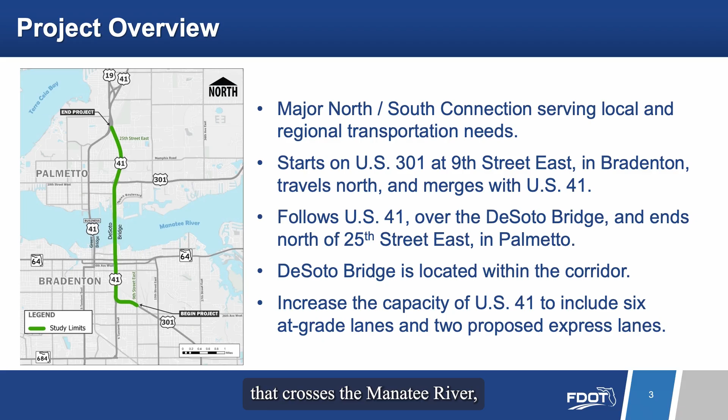It includes an important north-south connection that crosses the Manatee River, connecting the cities of Bradenton and Palmetto, and serves local and regional transportation needs.

The study starts on US 301 at 9th Street East in Bradenton, travels north and merges with US 41. The study continues along US 41 over the DeSoto Bridge and ends north of 25th Street East in Palmetto. The DeSoto Bridge is located within the corridor.

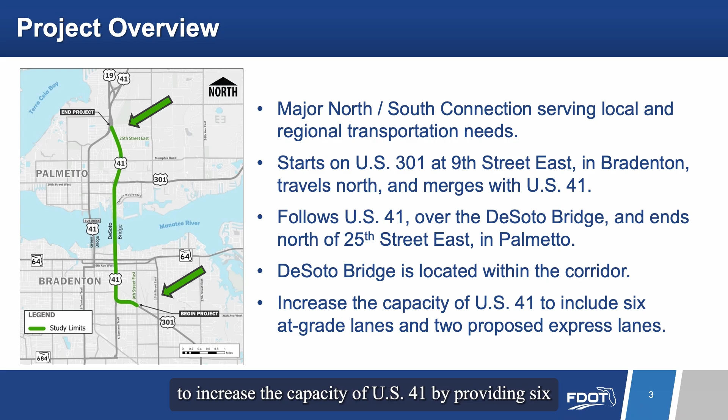The department proposes to increase the capacity of US 41 by providing 6 at-grade lanes and 2 proposed express lanes.

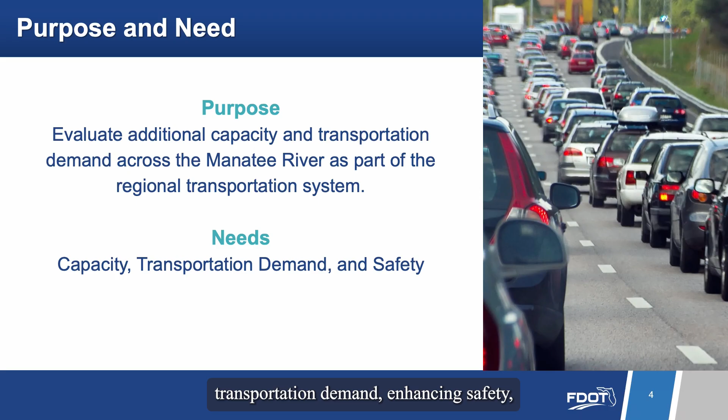By 2045, Manatee County's population is projected to increase by almost 200,000 people. As a result, our alternatives focused on increasing capacity by adding lanes, addressing growing transportation demand, enhancing safety, and improving our regional transportation system.

Within the project limits, the existing roadway includes multiple roadway configurations with a varying number of travel lanes and bicycle and pedestrian facilities. The following slides illustrate the current existing conditions of US 301, US 41 within the study area.

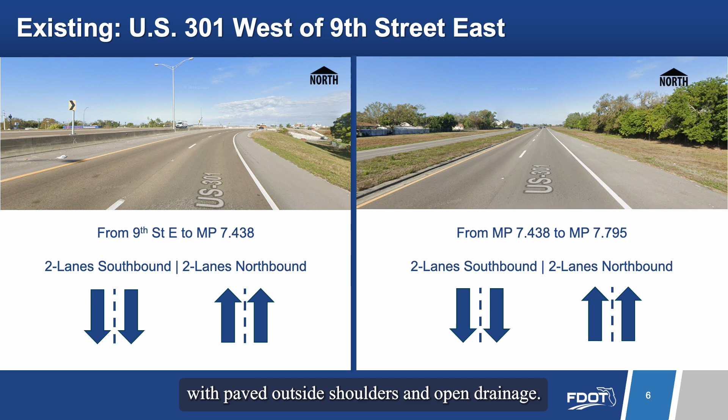The no-build alternative assumes that no capacity improvements are made through the year 2045 except routine maintenance. US 301 west of 9th Street East is 2 lanes southbound and 2 lanes northbound, with no sidewalks and no bike lanes. The median varies from a concrete barrier to a grassed median with paved outside shoulders and open drainage.

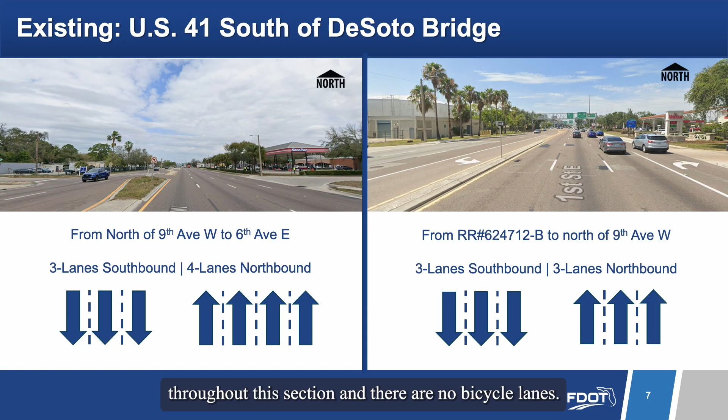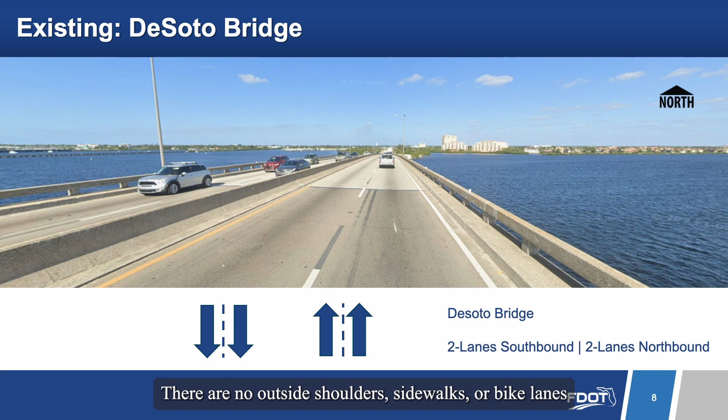The existing DeSoto Bridge has 2 southbound and 2 northbound lanes separated by a concrete barrier. There are no outside shoulders, sidewalks, or bike lanes on the bridge.

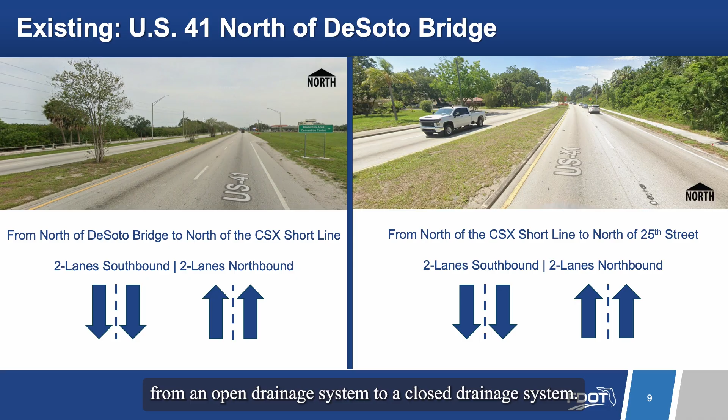US 41 north of the DeSoto Bridge has 2 southbound and 2 northbound lanes, separated by a grass median with intermittent sidewalks and no bike lanes. The corridor varies from an open drainage system to a closed drainage system.

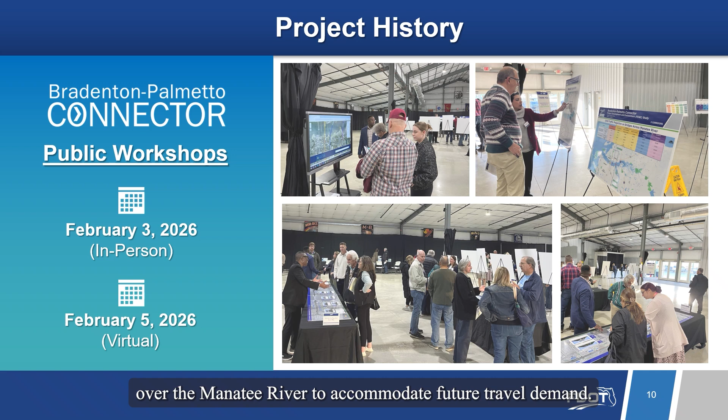Throughout this PD&E study process, FDOT evaluated multiple concepts to improve the operational capacity over the Manatee River to accommodate future travel demand. After environmental and engineering analyses and public and agency comments, many of these alternatives were eliminated.

The last Bradenton-Palmetto Connector public workshops were held in person on Tuesday, February 3, 2026, and virtually on Thursday, February 5, 2026. Based on your feedback and additional environmental and engineering analyses, a preferred alternative was selected for the Bradenton-Palmetto Connector.

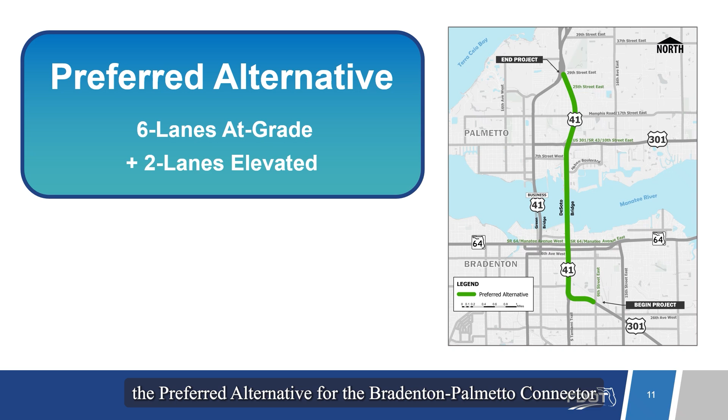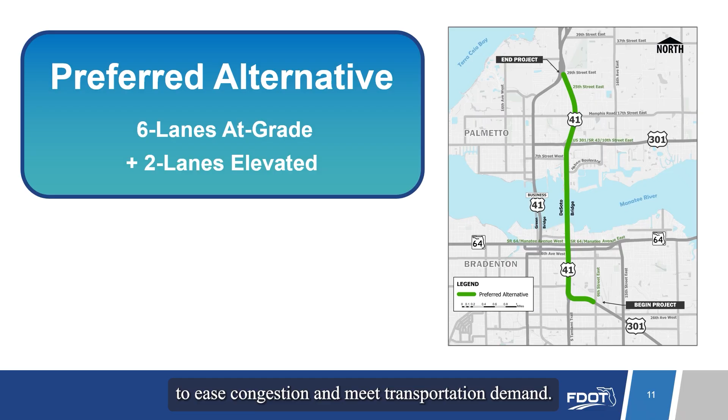The preferred alternative for the Bradenton-Palmetto Connector results in adding capacity to US 301, US 41 between 9th Street East in Bradenton and north of 25th Street East in Palmetto to ease congestion and meet transportation demand.

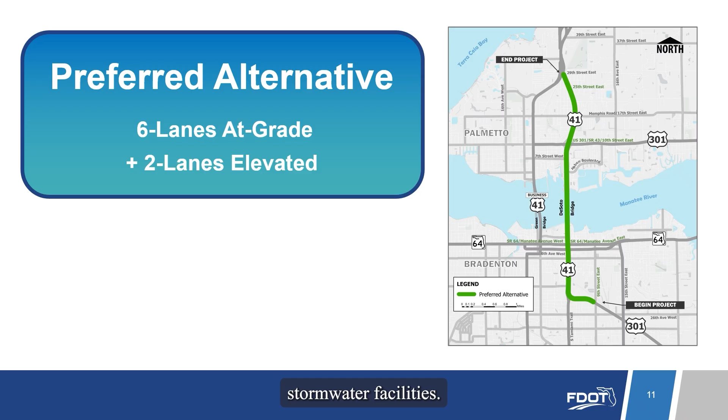Bicycle and pedestrian facilities will be provided throughout the project limits. Stormwater runoff will be conveyed to off-site stormwater facilities. The design speed varies from 40 miles per hour to 45 miles per hour throughout the project area.

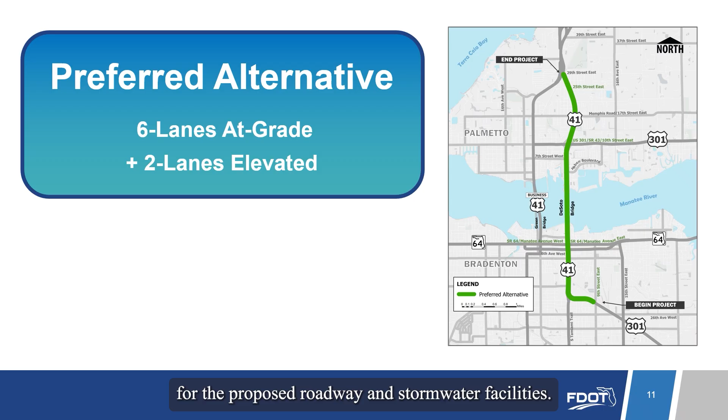It is anticipated that additional right-of-way will be required for the proposed roadway and stormwater facilities. For additional information on potential parcel impacts, please speak with a staff representative here tonight. The following 3 slides show the proposed long-term improvements.

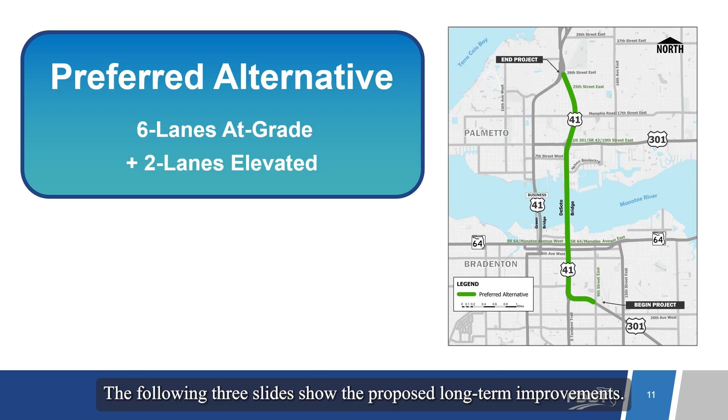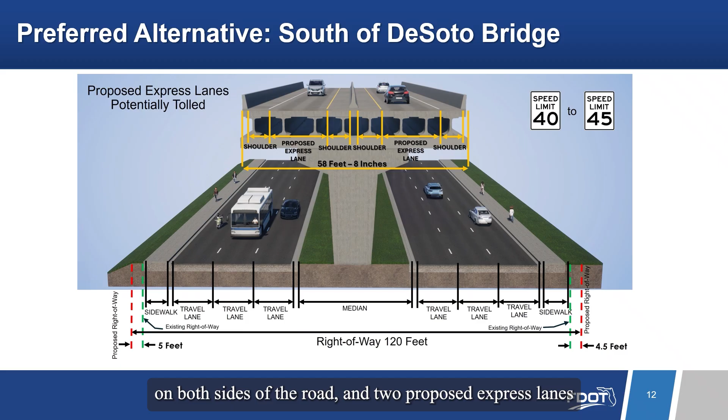South of the DeSoto Bridge, the proposed roadway would include 6 at-grade lanes with sidewalks on both sides of the road and 2 proposed express lanes elevated on a structure that could be tolled.

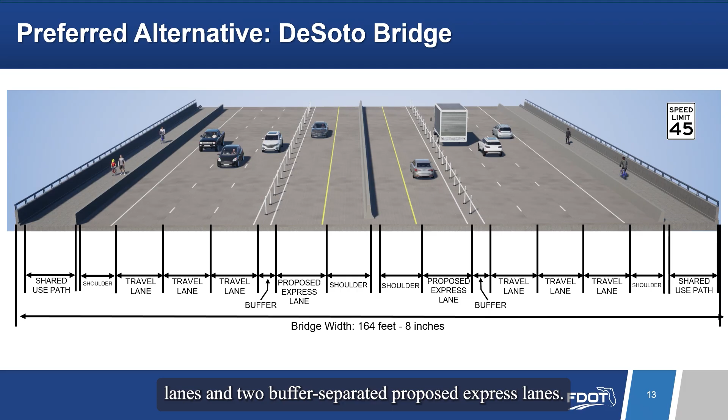The DeSoto Bridge is proposed to include 6 general-purpose lanes and 2 buffer-separated proposed express lanes. Shoulders and a shared-use path would be included on both sides. A concrete barrier would separate the 2 directions of travel.

North of the DeSoto Bridge, the proposed roadway would include 6 at-grade lanes, a shared-use path on both sides, and 2 proposed express lanes elevated on a structure that could be tolled.

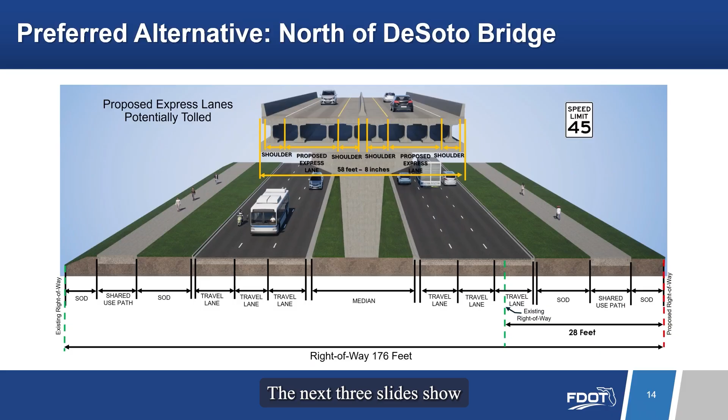The next 3 slides show the proposed interim improvements, which are intended to provide near-term congestion relief or improved traffic flow. It would be built before the elevated lanes.

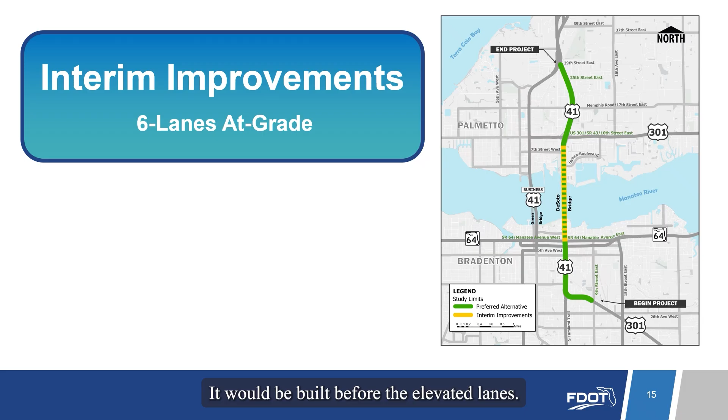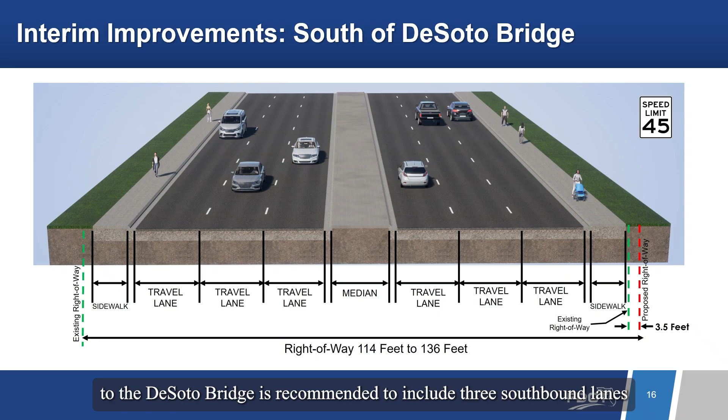In the proposed interim improvements, the roadway from westbound State Road 64, Manatee Avenue, to the DeSoto Bridge is recommended to include 3 southbound lanes and 3 northbound lanes, with sidewalks on both sides, no bike lanes, and a raised median.

On the DeSoto Bridge, the proposed interim improvements include 3 through lanes in each direction, inside shoulders, and a shared-use path on both sides of the bridge. The bridge will be built to accommodate the preferred alternative.

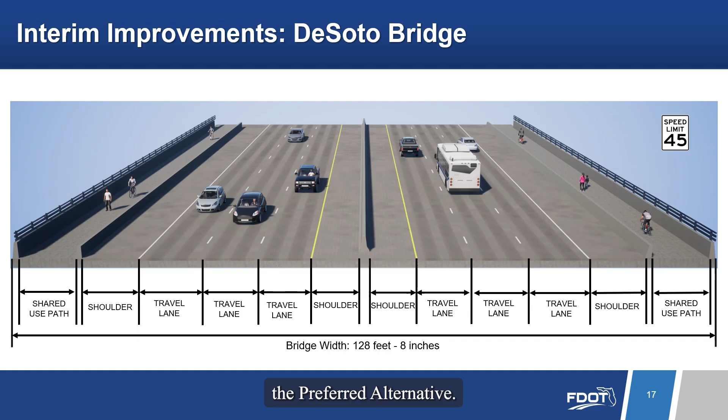The roadway north of the DeSoto Bridge is proposed to include 3 southbound lanes and 3 northbound lanes, separated by a grass median with a shared-use path on both sides of the roadway, and no bike lanes.

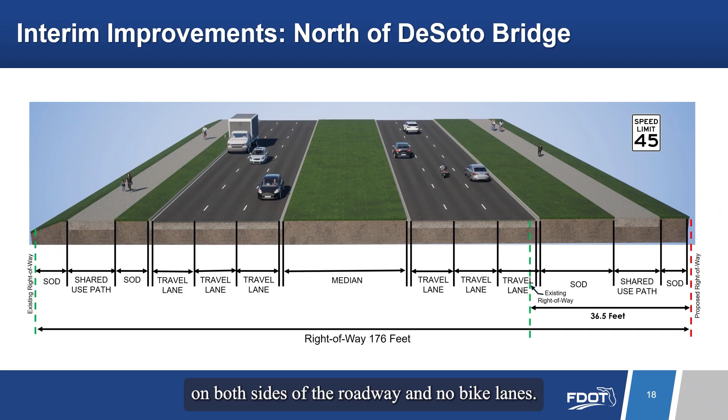Throughout this study, a no-build alternative is also considered. The no-build alternative assumes that no improvements are made through the year 2045 except for routine maintenance. There are advantages and disadvantages to the no-build alternative.

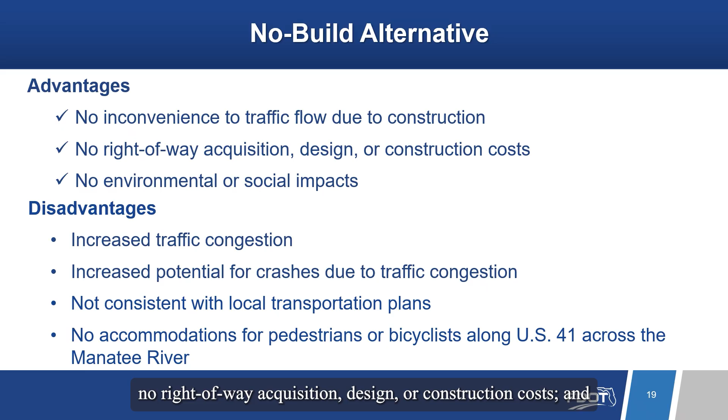Advantages of the no-build alternative include no inconvenience to traffic flow due to construction, no right-of-way acquisition, design, or construction costs, and no environmental or social impacts.

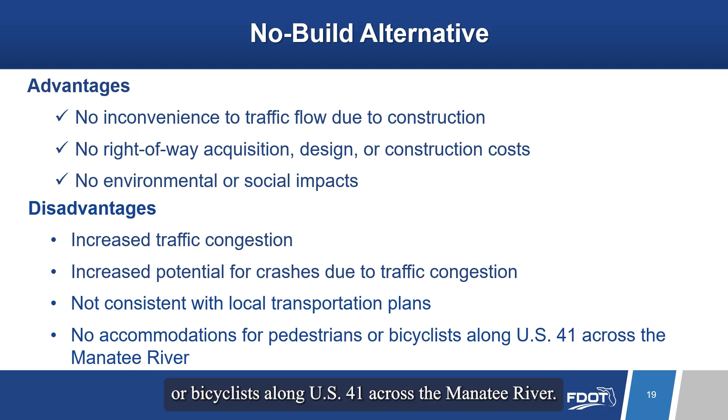Disadvantages could include increased traffic congestion, increased potential for crashes due to traffic congestion, not consistent with local transportation plans, and no accommodations for pedestrians or bicyclists along US 41 across the Manatee River.

The no-build alternative remains a viable option and will continue to be evaluated until the completion of this study.

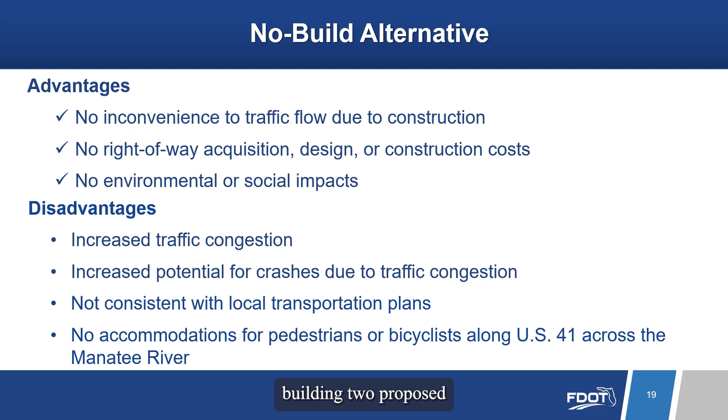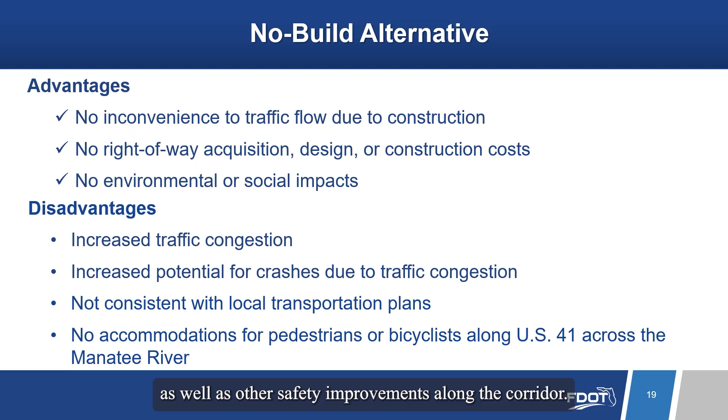However, the Bradenton-Palmetto Connector preferred alternative would include increasing roadway capacity, building 2 proposed express lanes, 2 additional general-purpose lanes, replacing the DeSoto Bridge, and adding bicycle and pedestrian facilities as well as other safety improvements along the corridor.

FDOT evaluated environmental and socioeconomic factors relating to the new proposed improvements in accordance with the National Environmental Policy Act of 1969, as amended, and other federal requirements. The evaluation considered the effects on US 301, US 41 to accommodate 6 lanes at grade and 2 proposed express lanes for the Bradenton-Palmetto Connector, including wetlands, protected species, water quality, contamination sites, recreational sites, noise, air quality, historic structures, archaeological sites, and floodplains.

Based on the analysis, there are no significant effects associated with the preferred build alternative. The following slides describe the preferred alternative impacts only. For interim improvements impacts, please refer to the evaluation matrix display board presented this evening.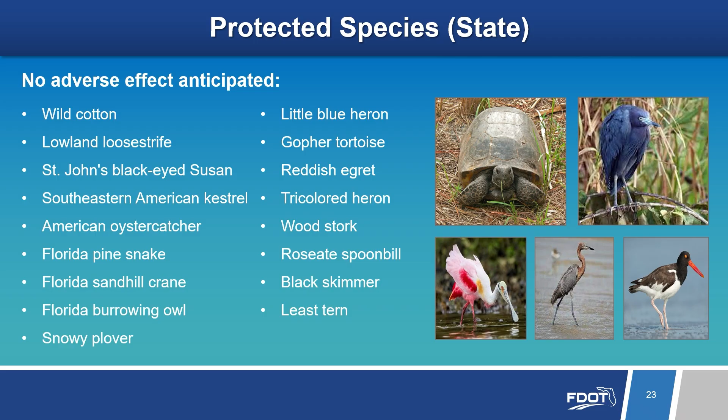It was determined that the project will have no adverse effect anticipated on the state-listed threatened and endangered species listed on the screen. Coordination with the U.S. Fish and Wildlife Service, the Florida Fish and Wildlife Conservation Commission, and the National Marine Fisheries Service regarding the final status of these species is ongoing.

If the preferred alternative is approved by the Office of Environmental Management, FDOT District 1 will continue to work closely with environmental agencies in future phases, such as design and construction, to meet all environmental permitting requirements.

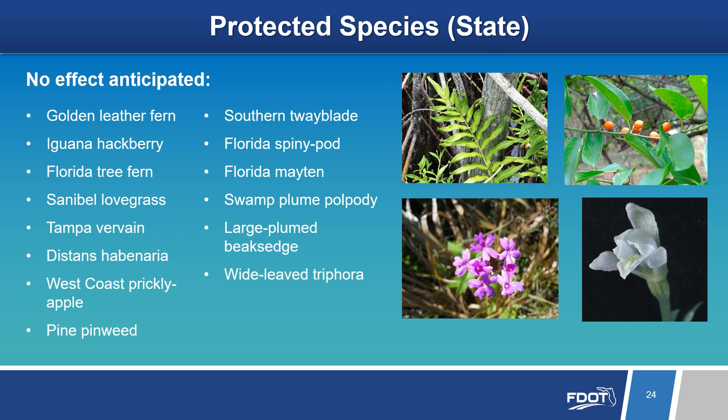FDOT evaluated wetlands within the project limits in accordance with Executive Order 11990, Protection of Wetlands. The proposed improvements will affect approximately 1.83 acres of wetlands, less than 0.10 acres of surface waters, and 1.10 acres of other surface waters. The department will mitigate wetland impacts which will result from the construction of this project pursuant to Section

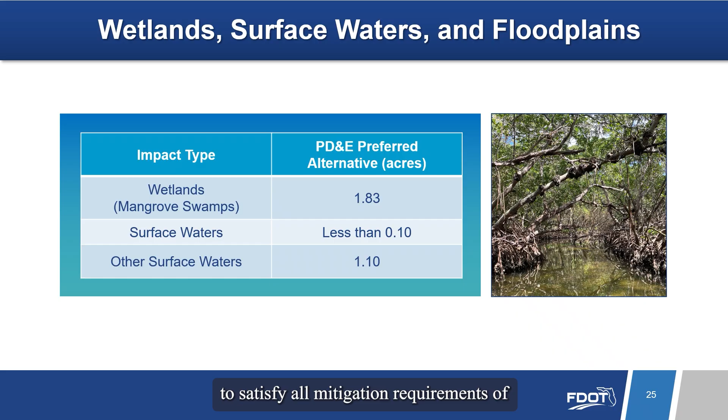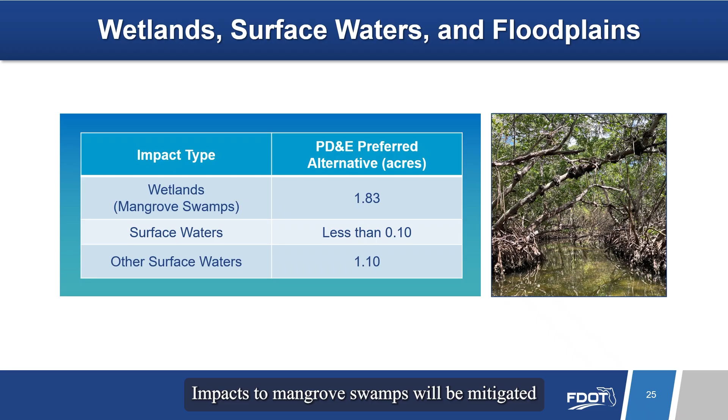373.4137 Florida statutes. To satisfy all mitigation requirements of Part 4 of Chapter 373 Florida statutes and 33 U.S. Code USC 1344, impacts to mangrove swamps will be mitigated by the purchase of wetland credits through a federal and state permitted mitigation bank whose service area is within the Manatee River watershed.

The project has been evaluated for potential floodplain involvement in accordance with Executive Order 11988, Floodplain Management. Although this project is located within the limits of the 100-year floodplain, no work is being proposed below the 100-year flood elevation, and thus, this project does not encroach upon the base floodplain.

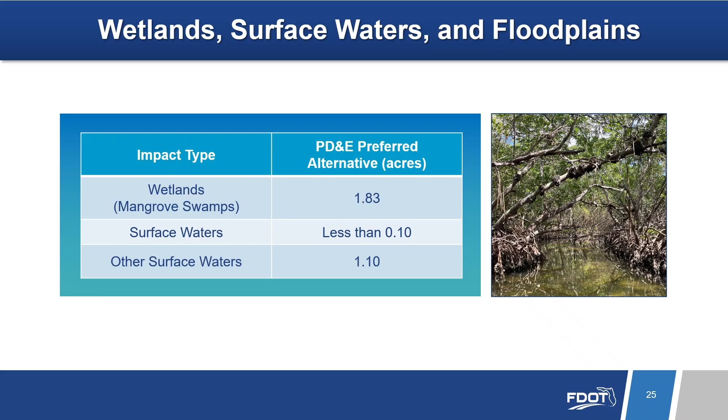Traffic noise studies were conducted for the preferred alternative. Traffic noise impacts were predicted during the design year at residential and recreational land uses.

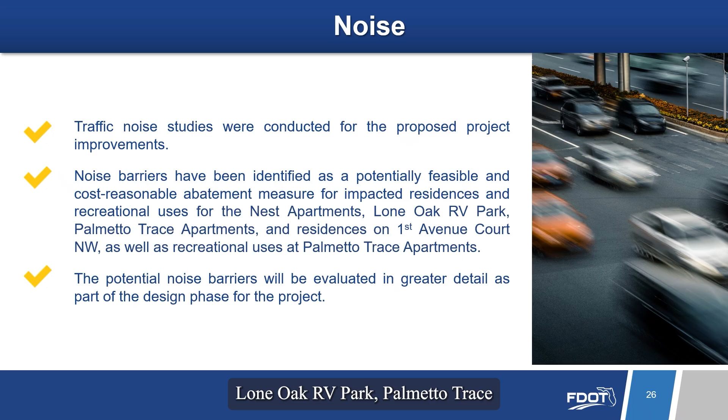Noise barriers have been identified as a potentially feasible and cost-reasonable abatement measure for impacted residences at the Nest Apartments, Lone Oak RV Park, Palmetto Trace Apartments, and residences on First Avenue Court Northwest, as well as recreational uses at Palmetto Trace Apartments. The potential noise barriers will be evaluated for engineering and construction feasibility during the project's design phase.

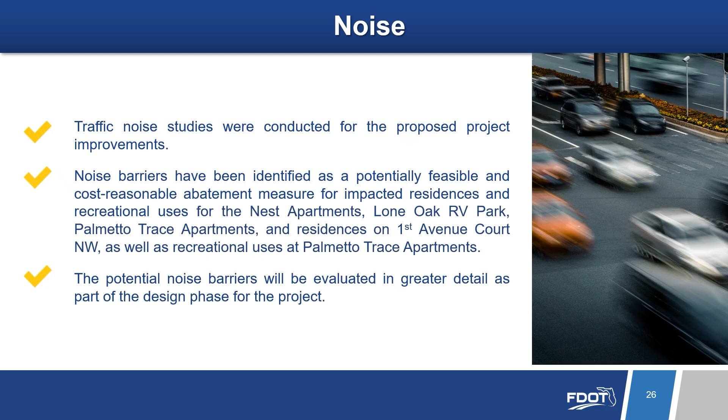The team examined the project area for publicly owned properties that may be affected under Section 4F of the Department of Transportation Act of 1966. Coach Eddie Shannon Park, also known as Lincoln Park, is a Section 4F resource.

The preferred alternative includes constructing the northbound travel lanes and the associated clear zone. FDOT will further coordinate with Manatee County during the design phase regarding potential impacts within Coach Eddie Shannon Park.

Based upon the proposed minor impacts, the project will not adversely affect the features and use of Coach Eddie Shannon Park. Therefore, FDOT is pursuing a Section 4F de minimis finding. This hearing provides the opportunity for public comment on the project's impacts on Coach Eddie Shannon Park.

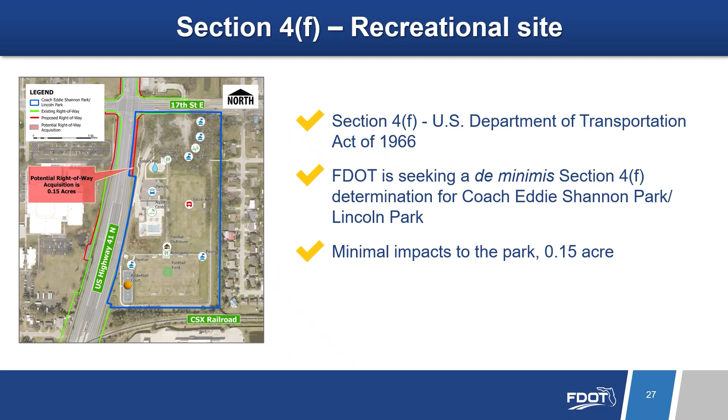To accommodate the roadway widening and anticipated stormwater facilities and floodplain compensation sites, acquisition of additional right-of-way is anticipated. The preferred alternative may impact 100 parcels, 1 potential business relocation, and 21 potential residential relocations are anticipated for stormwater facilities. These are shown on the concept plans.

All right-of-way activities will follow Sections 339.09 and 421.55 Florida Statutes, as well as the Federal Uniform Relocation Assistance and Real Property Acquisition Policies Act of 1970, commonly known as the Uniform Act. If you are required to move, you can expect to be treated fairly and in full compliance with these laws.

An appraiser will inspect your property, and you are encouraged to be there during the inspection. This is an opportunity to share any information that might help establish the value of your property with the appraiser. You may also be eligible for relocation assistance and payment benefits.

If you disagree with the decision regarding your eligibility or the amount offered, you do have the right to appeal. FDOT will ensure you have the forms and assistance needed to complete an appeal. If you move before receiving official notice, your relocation benefits may be jeopardized. The relocation specialists for this project are available and can answer your questions and provide more information regarding relocation assistance.

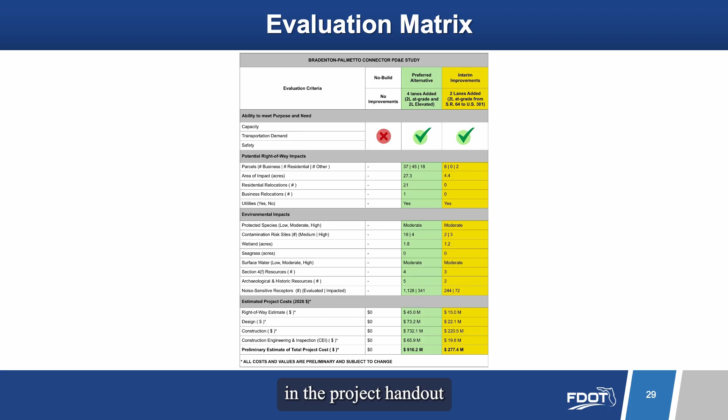An evaluation matrix showing a detailed comparison of the preferred alternative and the no-build alternative is provided in the project handout and is also on display here this evening. The matrix shows potential effects on the social, cultural, natural, and physical environments and identifies preliminary costs.

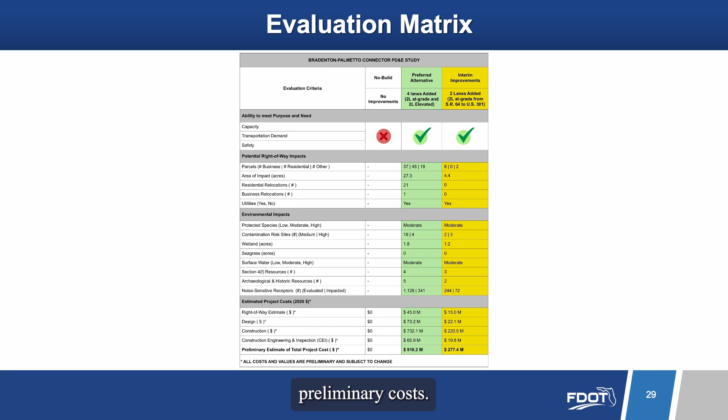The estimated costs for the Bradenton-Palmetto Connector, US 301, US 41, from 9th Street East south of Bradenton to north of 25th Street north of Palmetto, approximately 4.5 miles, include $45 million for right-of-way acquisition for roadway and stormwater management areas, and $73.2 million for final design.

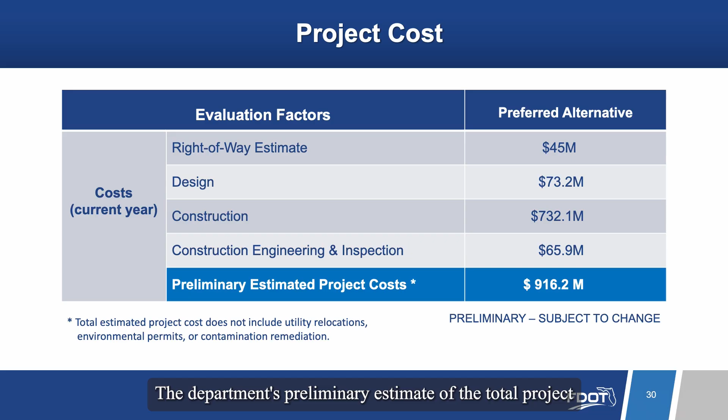The total estimated construction cost for the project is $732.1 million. The cost for construction engineering and inspection is estimated at $65.9 million. The department's preliminary estimate of the total project cost is $916.2 million.

The project team has been actively developing and evaluating alternatives and preparing study documents. FDOT anticipates the location and design concept acceptance of this study will occur in late 2026. The study schedule is on display this evening.

At this time, the FDOT's adopted 5-year work program includes funding for the PD&E study. There is partial funding for design and no funding for right-of-way or construction. The department is actively seeking funding mechanisms to construct all or portions of the project.

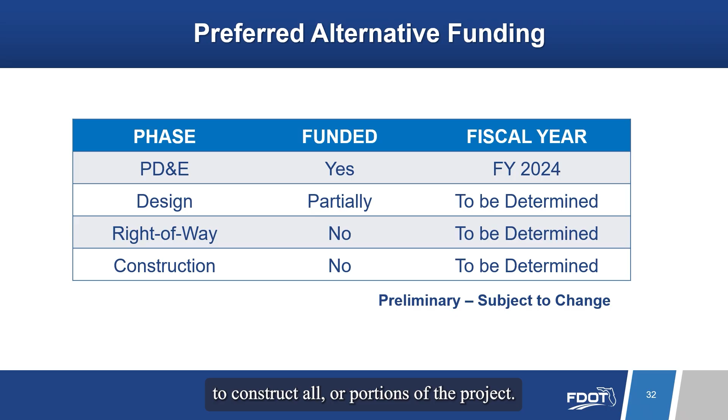We encourage you to review project information tonight and provide us your feedback. There are multiple ways to provide comments: during the live in-person event by completing a speaker card and handing it to anyone with a name tag during the upcoming intermission, providing your comment to the court reporter at the comment table, by mail to the address shown on the screen, or by email or through the project website. All comments carry equal weight and should be submitted or postmarked by July 27, 2026 to become a part of the formal hearing record.

All hearing materials presented tonight are available to the public on the project webpage and will remain posted for your review. The technical documents are also available for review in person at Central Library, Palmetto Branch Library, and FDOT Manatee Operations Center until July 27, 2026. Documents will remain on the project webpage following the hearing.

If you would like to review these materials at the FDOT Manatee Operations Center, please make an appointment by contacting FDOT's Project Manager, Michelle Rudishauser, using the contact information included in your handout. You may also visit the project website for the latest study information, schedule, and upcoming events.

This PD&E study is being conducted and completed according to the requirements of the National Environmental Policy Act and other related federal and state laws, rules, and regulations, which will qualify future phases of this project for federal funding, and this hearing was advertised consistent with those requirements. Please see the statute display board for all other applicable requirements.